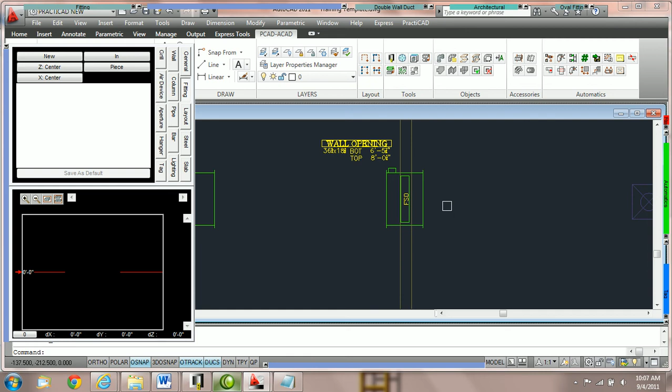Here we have a damper that is sitting in the middle of a wall. Currently, we are going to find out which side is on the in and which side is on the out, and we're talking about connections. This is easy to do. All you need to do is click on any duct in PractiCAD and look for the square blue node. If you look where the square blue node is and then go to your fitting box, whatever is listed here is the connection point. For example, the fitting box here says in. Therefore, this is the in joint of this fire damper.

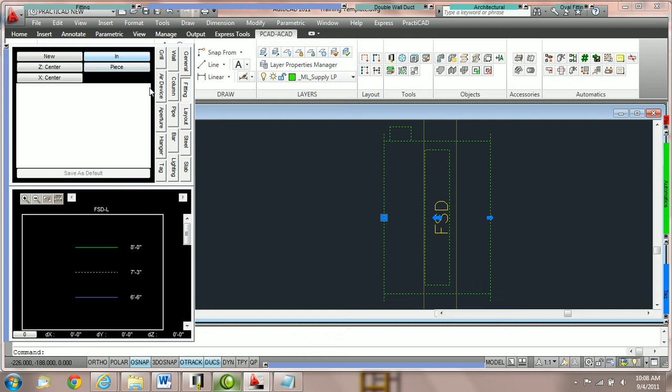If I were to switch this to the out, you will notice that the node moves to the outside. Therefore, the out joint is here and the in joint is here. Once again, if I switch it back to the in, you'll see that the blue node will change. If I am to run duct on both sides of this fire damper, the proper way to do this is to make sure that I hold the in joint when attaching to the out and hold the out joint when attaching to the in.

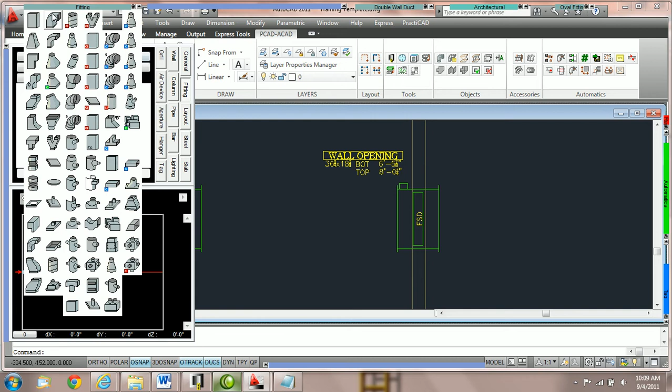So what we're going to do is we're first going to hold duct by the in, and we're going to grab a fitting. Notice that we're going to bring this fitting over to the fire damper, and I'm holding it by the in joint, and I'm going to bring it right over to the node of the out joint. PractiCAD will resize and snap the duct. I can now snap another piece, and I can continue all the way out to my grill.

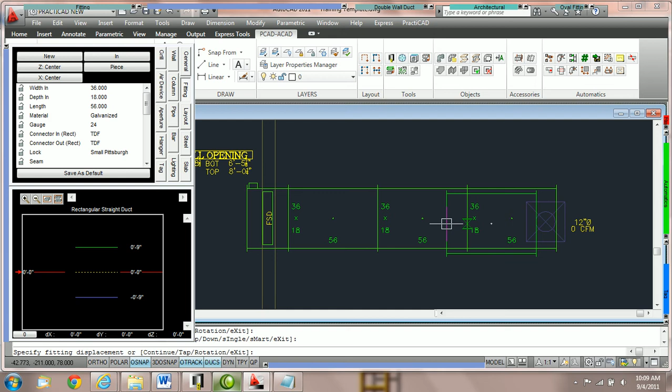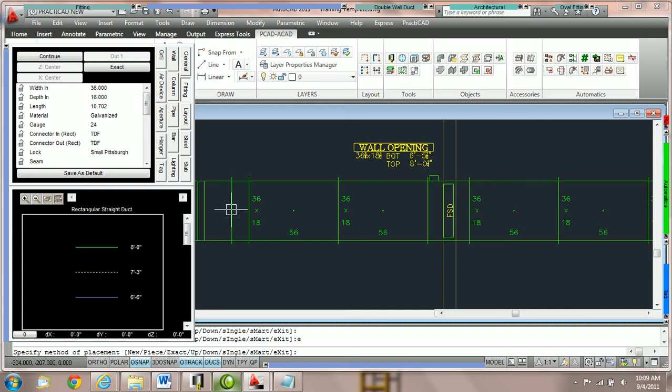Now, if I would like to start routing duct backwards, the proper way to do this would be to hold my duct by the out joint, and then I want to bring the out joint and connect it to the in joint of this fire damper. You will notice that when I hit C, enter for continue, the duct is actually routing backwards into this joint. So I'm going to route duct directly to this particular fitting. Now, we have done this properly.

The improper way of doing this would be as follows. I would not want to hold the duct by the in joint and then bring my fitting over to the fire damper, click and rotate it in this direction. You can see that it's actually not snapped because I'm attaching the in to the in. It's not really connected. And then I start routing in this direction. If I do this, I've actually taken fittings and I've routed them incorrectly. This is going to break our ductline integrity.

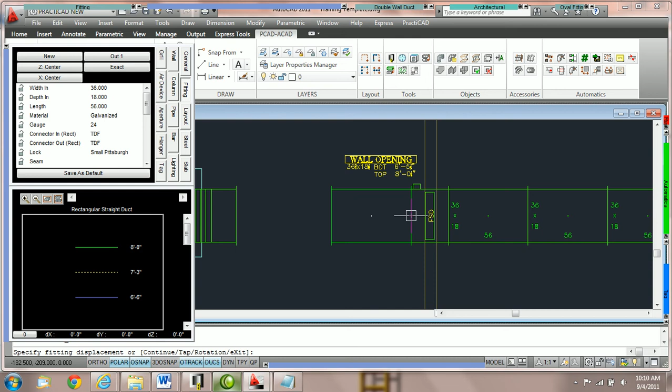So if I want to route duct from the in joint of this damper to the out joint of this radius elbow, once again, I'd like to grab rectangular duct, hold it by the out, snap to my first point, and now we're just going to route it and snap to my second point. You will know if ductline integrity has been kept when you go to edit your ductwork. For example, we're going to zoom in on this section of the drawing right here, and then we're going to make a change.

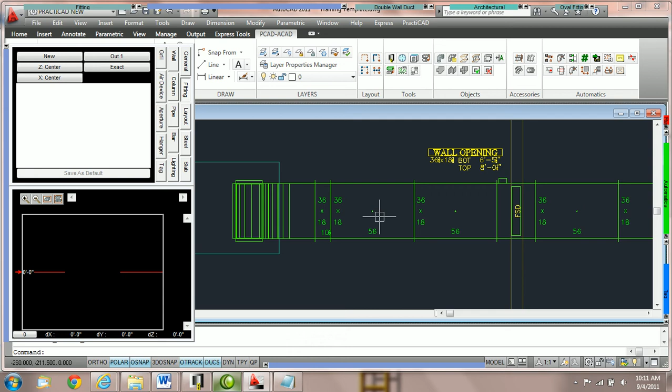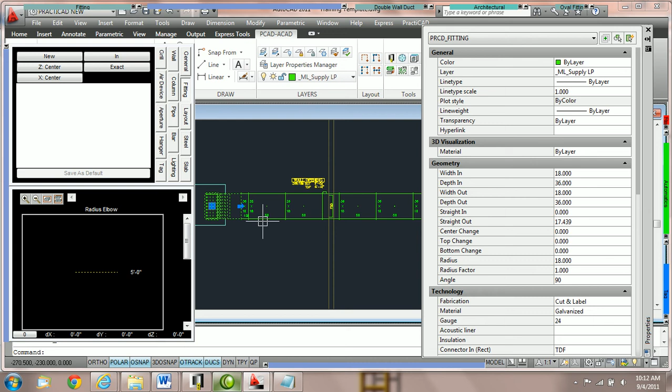We're going to click on the radius elbow, and then we're going to change the property Depth Out. If ductline integrity is maintained and all the duct is connected with the proper in-out connections, this should edit the entire duct line forward. Notice when I go to depth out and type in 42 and hit enter that it does all change at once because the edit is carried through the duct line all the way to the end. That is a good indication that our duct line integrity has been maintained.

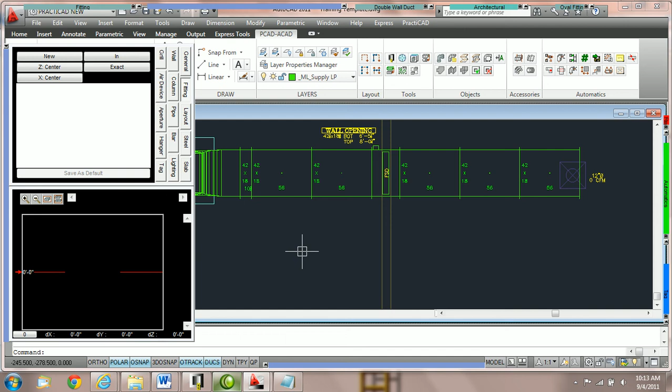What would have happened if we did it incorrectly? Well, we're going to basically undo what we've done. We're going to erase this section, and now we're going to draw, but this time we're going to hold the in connection, attach it to the in connection, and route it improperly. I'm going to grab the ductwork. I'm going to click here and then rotate the ductwork in this direction. Then I'm going to route it all the way to this fitting here.

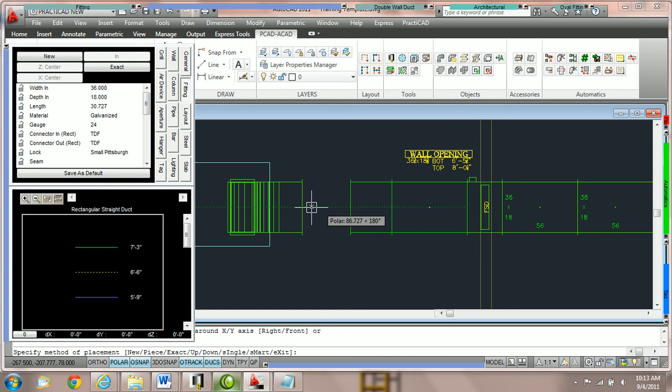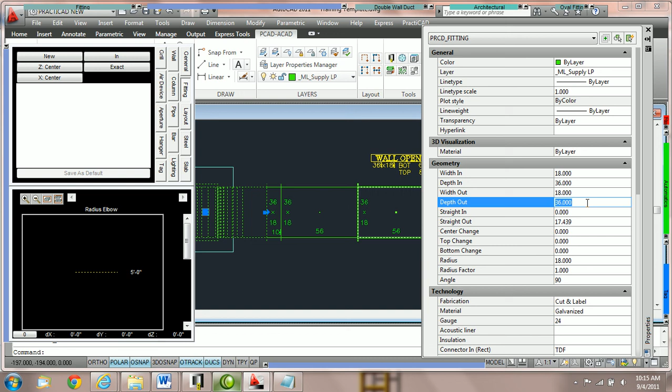Once this duct line is connected improperly, we're now going to try to make the same edit. Notice I am now going to click on the radius elbow. Then I'm going to change the properties to depth out 42. When I type in 42, it actually only changes this fitting here because we have not attached this correctly.

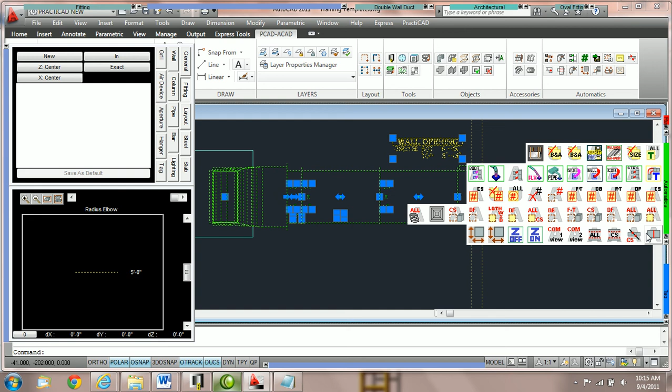As a matter of fact, there is an option in the software called Ductline Checking, which allows us to highlight our duct line and then run automatics, which will actually flag the points that duct is not connected. Notice that right here and right here, PractiCAD has stated that duct isn't connected, and that's because we did not connect it correctly. The proper way to do this, once again, will always be, we're going to undo what we've done to make sure when we grab our rectangular ductwork, if we're going to route from the in connection, we hold by the out connection.

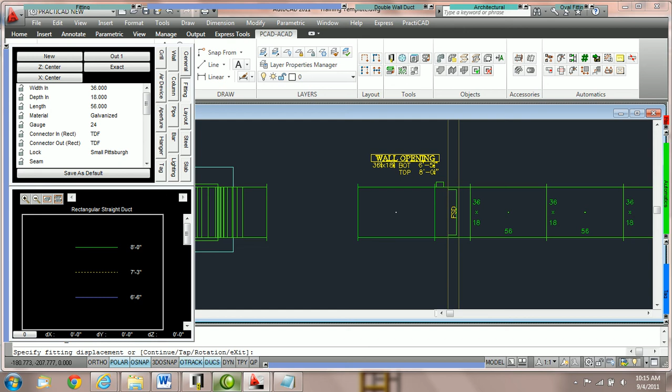Now, if I hold by the out and just route the duct to the end of my radius elbow, you will see if we run our Ductline Editing or Ductline Check that no red marks have appeared because this is connected correctly. Please go through the exercises on Ductline Integrity. That concludes this tutorial of the advanced options for In/Out.